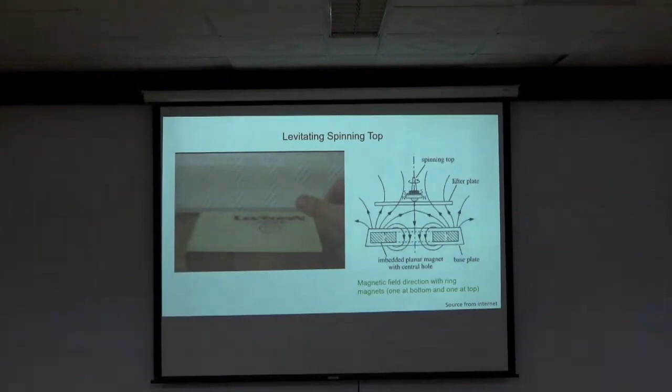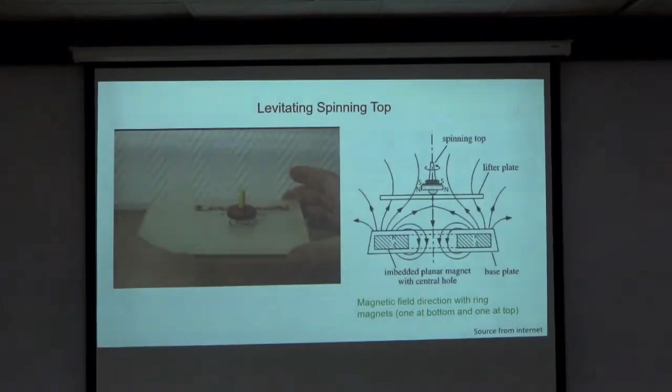I will just show a small video regarding levitation. This is levitation by permanent magnet of a spinning top. Now you can see that this rotating top is levitating in air, and this is due to two magnets, one at the bottom which is ring type, and another on the spinning top, also a ring type magnet, and you can see the magnetic field here.

This top will be in equilibrium where the magnetic field changes direction. So this is one example of how levitation works, but here once the top stops rotating, it will drop. So the condition is that it should keep rotating; only then are we able to levitate it.

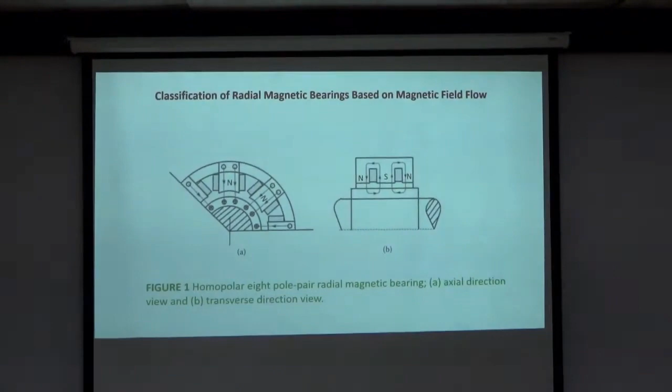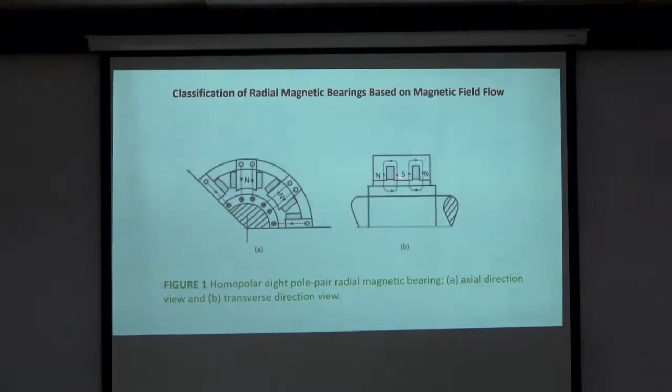Sorry. So coming to the classification of bearings, based on various types they can be classified. One of them is how the magnetic field flows through the shaft. In this particular thing, this is the shaft. In these magnetic bearings, you can see the field is parallel to the shaft's axis.

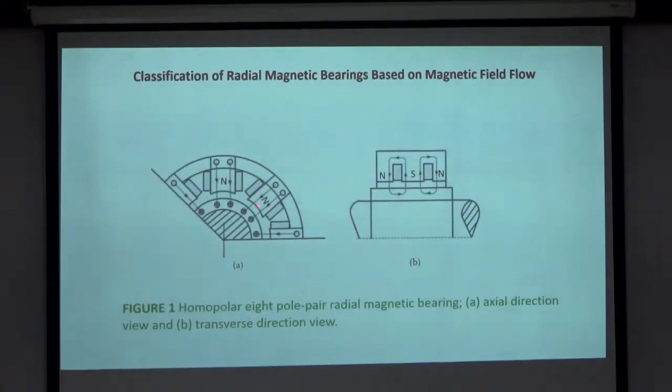And if you see the other view of the same magnetic bearing, in this case you can see the north pole. All are north poles on this side of the magnetic bearing. This side, at the back, is the south pole. Because all poles are the same, that's why it is called homopolar.

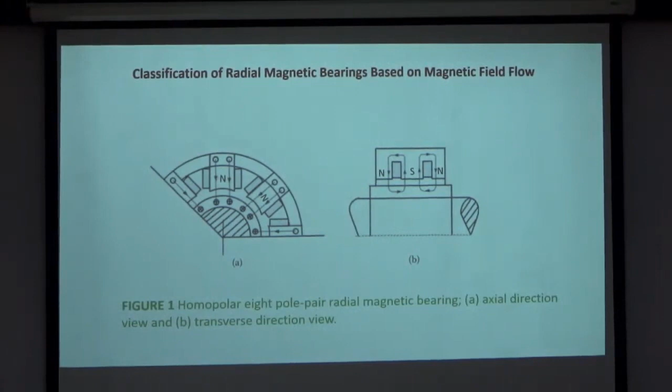And this particular, as I mentioned earlier, to make the flow of the magnetic field closed, we need to have north and south pole. Okay, so here we can count: this is 1, 2, 3. Similarly, if you count like this, there will be 8 such poles which are balancing the rotor. That's why it is called 8 pair pole magnetic bearing. This is one of the classifications, in which the magnetic flow is in the axial direction of the bearing.

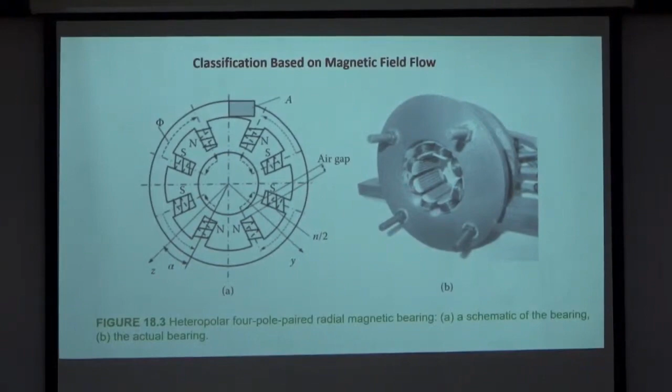So this is one of the actuators which we have in our lab. This is the same 8 pole heteropolar magnetic actuator. You can see there are 8 poles, pair poles in this. So this is a magnetic actuator. The shaft will carry this particular core, so that the magnetic losses are less, because steel losses will be more. So these are silicon steel. In this particular case we need to provide the core onto the shaft on the journal, so that the magnetic field will flow through this and the losses will be less as compared to pure steel.

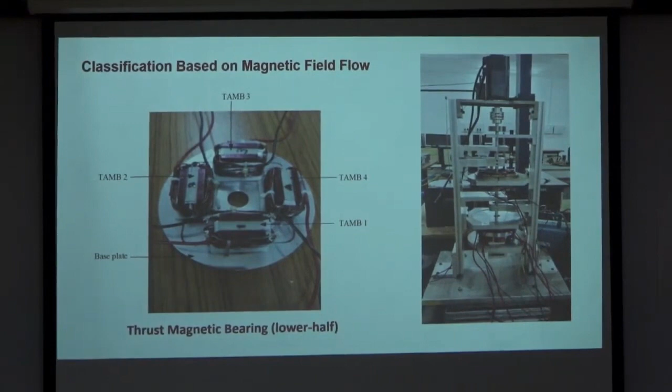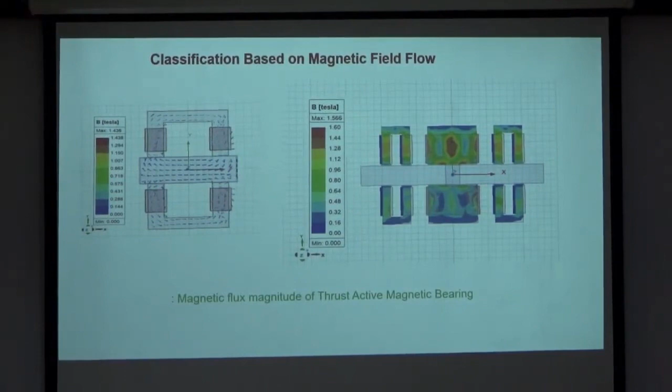Okay, and this is the magnetic field calculation we have done, in which you can see there are 2 poles here and 2 on this side. So there are 4 at the top and 4 at the bottom, and the magnetic pull we can calculate using this kind of software.

Okay, so again classification, I am still continuing with that. We can have either the passive magnetic bearing or the active magnetic bearing. Passive, as we have already seen, is pure levitation. In this we need to have some constraints, only then can we levitate the bearing, otherwise it is unstable. But with an active magnetic bearing we can control things, but we require a controller and an amplifier to do that. So this is another kind of classification we can do for the magnetic bearing.

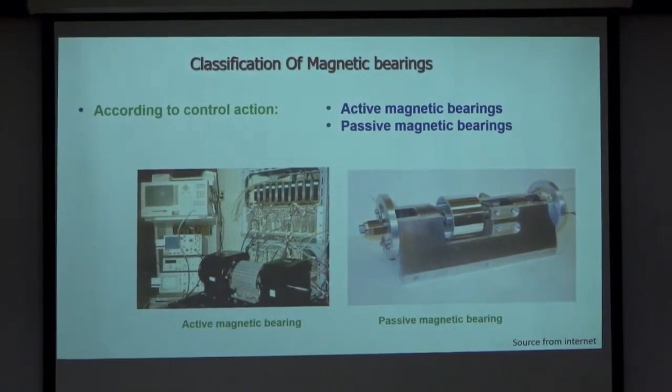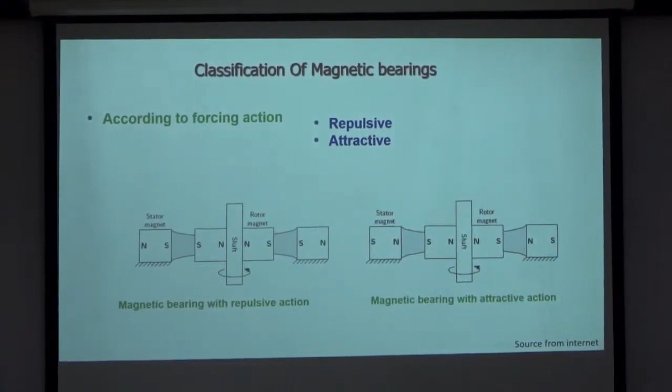Sometimes we use a combination of the electromagnet and permanent magnets. So with that we can have either a repulsive or attractive type of force to the shaft from the bearing. So based on the placement of the north and south pole, we are able to provide either a repulsive force onto the shaft, or an attractive force onto the shaft. So this is another kind of classification.

Sometimes, as I mentioned in the introductory slide, we require a displacement sensor to find out the operating position of the bearing, and that is another kind of classification in which we use sensors, and sometimes we don't use displacement sensors, but Hall sensors based on the magnetic field. We are able to obtain the magnetic field intensity, and we can have the controlling action with that.

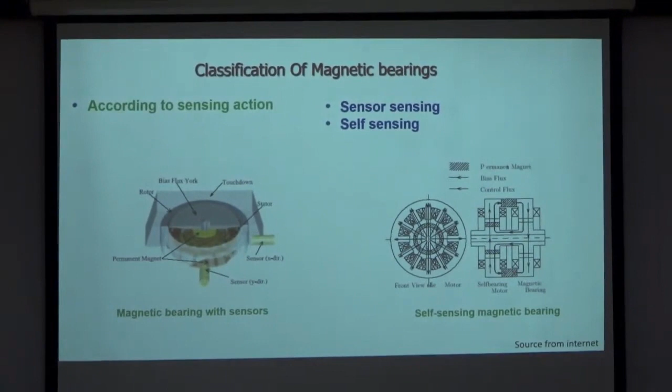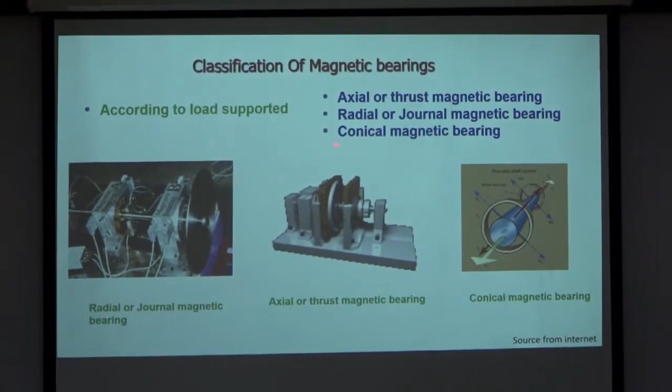So as for the other kinds of bearing, here also we can have axial or thrust magnetic bearing, radial or journal magnetic bearing. People have even tried out the conical magnetic bearing, in which a combination of both the radial and the axial thrust can be given, just like a taper roller bearing. Similarly, here also people have tried conical magnetic bearing.

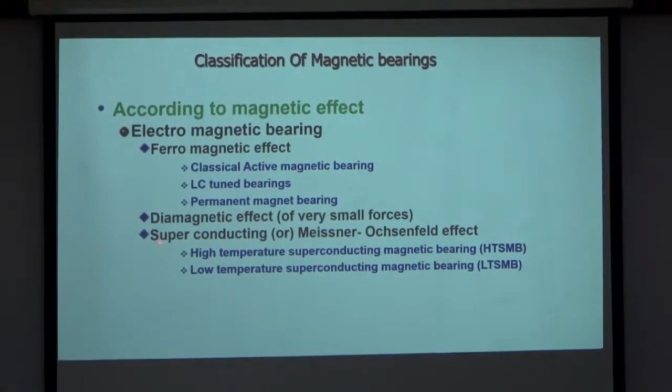There are several types of classification which we are able to do based on various criteria. These are some of the criteria. I will not go into much detail on this. So according to the magnetic effect, electromagnetic bearing, and then so many other classifications are there, like ferromagnetic effect, diamagnetic effect, or superconducting material. So this is one of them.

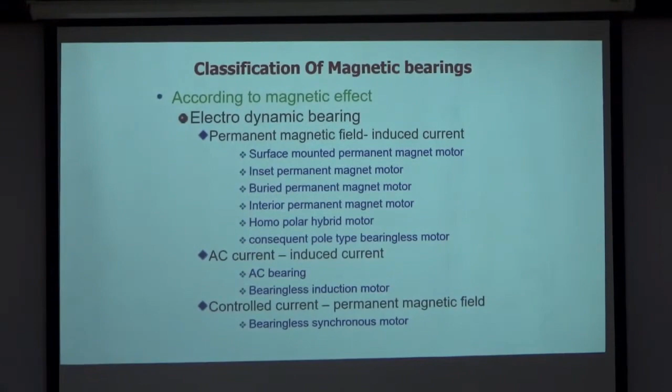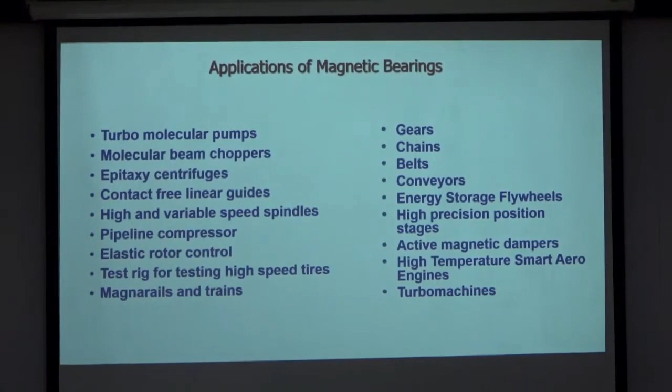Coming to the application, gradually you will find it is used especially where speed is the main criterion. If very high speed is there, when we are talking about 1 lakh RPM or more than that, then this magnetic bearing definitely has an advantage, and some of the applications I'll be describing in the next slide.

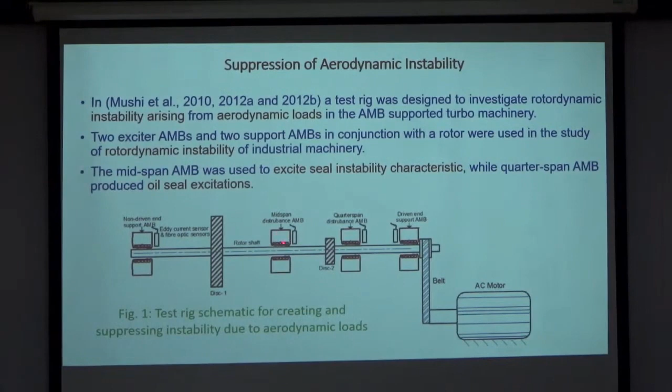So this is one of the applications in which you can see there is a shaft. There are 4 bearings, all are active magnetic bearings. The last ones on this end, the drive end, are the bearings supporting the shaft on air with magnetic actuation. In between there are 2 more magnetic bearings. They are providing some kind of aerodynamic instability or aerodynamic load which is actually there in the turbines. So in this particular case people are simulating the aerodynamic effect through this magnetic bearing.

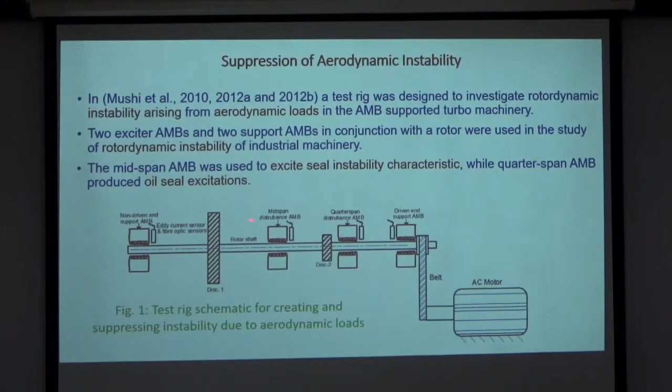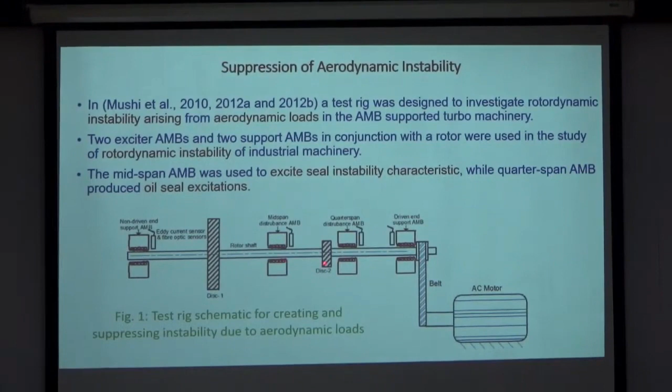So not only are we able to use the magnetic bearing for supporting, but any kind of excitation you want to simulate, that also we can simulate using the intermediate ones, and then we can check whether the supporting bearings are able to suppress that particular instability or not. So this is one of the applications, and this is the test rig for that from some other author. So these 2 are the supporting bearings. These are the disturbance bearings which are simulating aerodynamic instability in the rotor, and they are controlling that particular instability.

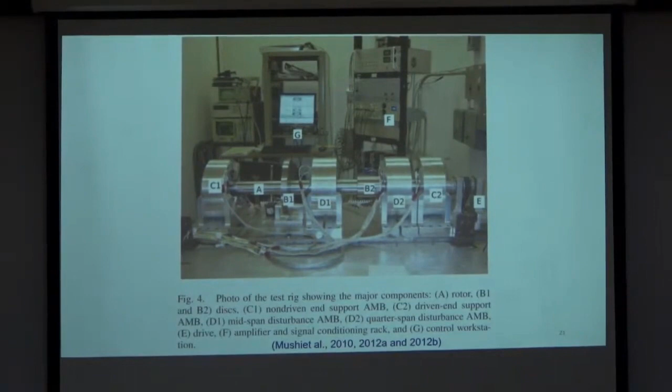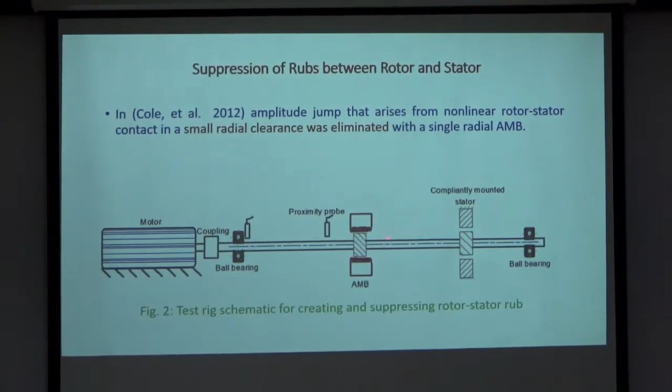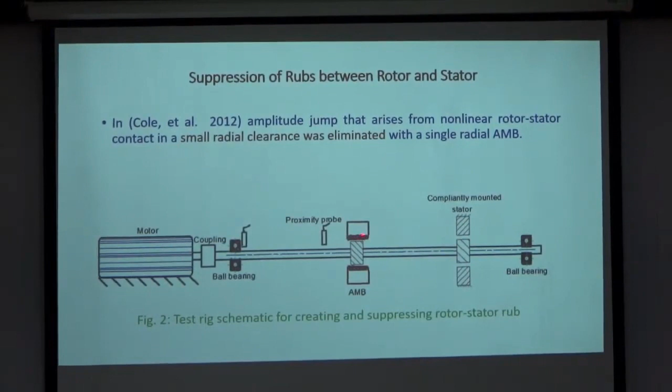Another application: if there is some kind of rub between the rotor and stator, this active magnetic bearing can help with that. We can have some operating position of the shaft, and if it is going beyond that, this particular disc will touch the stator. If this magnetic bearing is not there, this gap will close, and rotor and stator interaction will take place. But if the magnetic bearing is there, we can have its operating position, and as soon as this particular disc is going close to the stator, it will actuate and suppress that particular disturbance. So this is another application of the magnetic bearing.

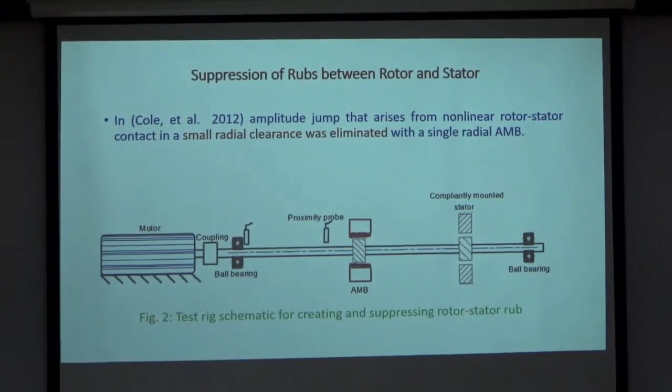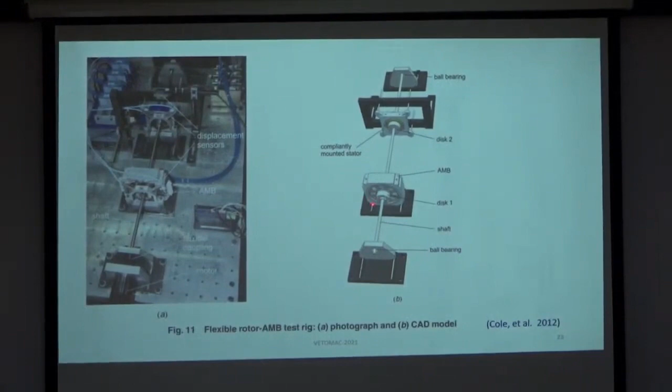So here you can see it is not supporting the shaft, but it is acting as a controller to suppress the vibration. This is the rig, I think the design, in which this is the magnetic bearing. Yeah, this is a magnetic bearing, and here that particular stator rotor interaction was taking place, so they were able to suppress that.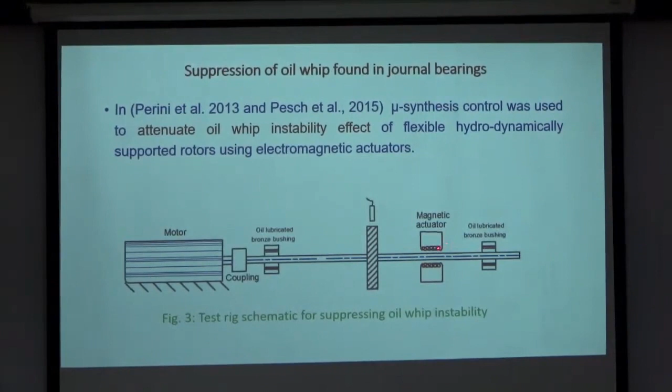Another application is the oil whirl which takes place in hydrodynamic bearings. So these are the hydrodynamic bearings, the shaft is mounted on them, but this magnetic bearing is suppressing that particular phenomenon if it is occurring. If there are large oscillations of the rotor, this magnetic actuator will act and suppress that particular disturbance. So this is another application of the magnetic bearing.

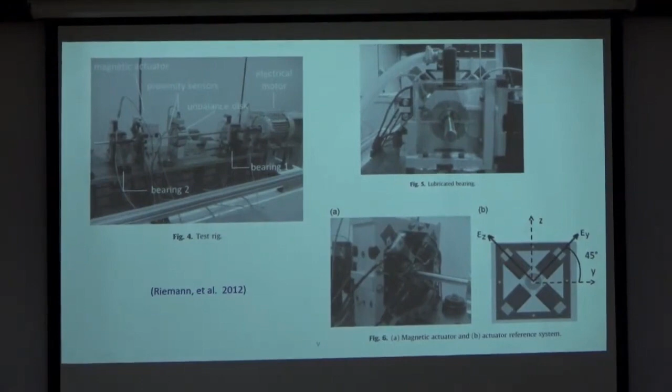This is the test rig the authors have designed. So you can see the rig, and this is the hydrodynamic bearing, and this is the magnetic bearing which is suppressing the oil whirl phenomenon.

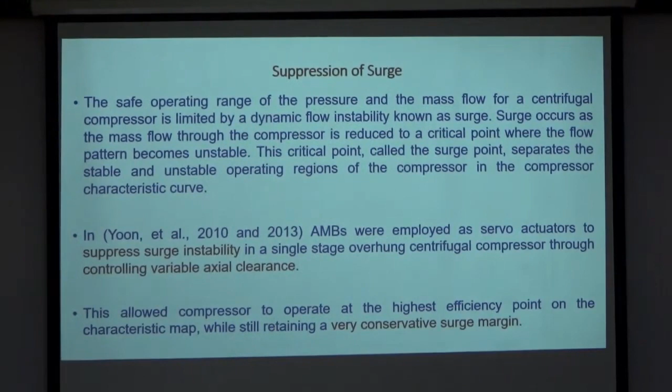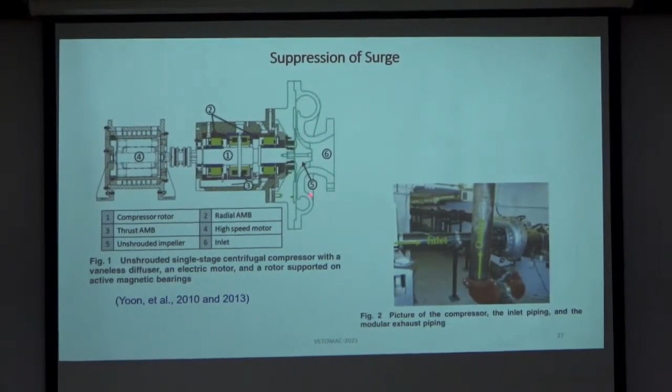Another example is the compressors, the surge phenomenon in which there is an instability condition of the pump. So here, this is a compressor, you can see the blades of this, and these two yellow ones are the radial magnetic bearings. In between there is a thrust bearing.

So here the impeller axial clearance was controlled by the thrust bearing, so that this compressor works in the optimal working condition or optimal efficiency conditions. So the axial thrust was controlled by this particular thrust bearing, to maintain the pump always at the best efficiency point. So not only radial control, but axial control also can help in increasing the performance of the bearing.

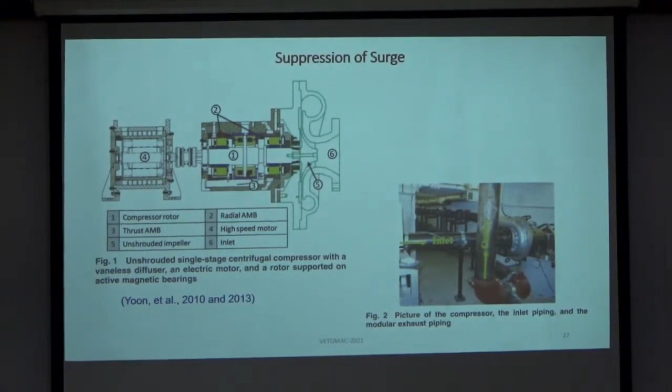So some of the advantages as compared to the conventional bearing I will now highlight. Because there is no lubricant, all the problems of lubrication, wear and tear will be eliminated here. Especially in applications where the lubricant may contaminate the other working fluid, the magnetic bearing has an advantage, like vacuum techniques. At very high speed, the only friction is between the air and the rotating rotor. So if we can provide a vacuum there, that friction can also be eliminated.

So clean and sterile rooms, like medicines and other applications, have a lot of applications. Transport of aggressive or pure media, where we don't want any lubricant to get into the fluid or material we are handling. So this is a typical actuator and the core of the magnetic bearing.

So this is one of the turbomolecular pumps which is used especially in separators. For example with petroleum, if they want to separate its various contents, they use this turbomolecular pump, and that operates on the order of 1 lakh rpm or more. For that, conventional bearings will generate very much heat.

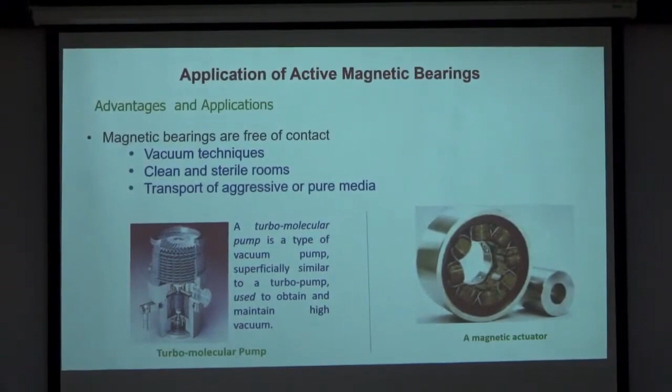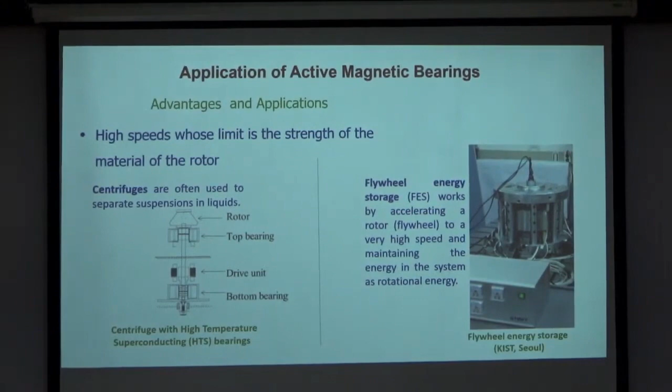Then there is the application in the centrifuge, and now people are using it for flywheel energy storage systems, for instance in the power plant, because a very large flywheel can be made and floated with the magnetic bearing, and energy can be stored. Whenever there is a deficiency of electricity, this energy can be taken out again. Even for e-mobility, they are using energy flywheels in automobiles. So I'll show some slides on that also, like this one. People have already started developing.

Professor Tiwari, yes, we have 5 more minutes.

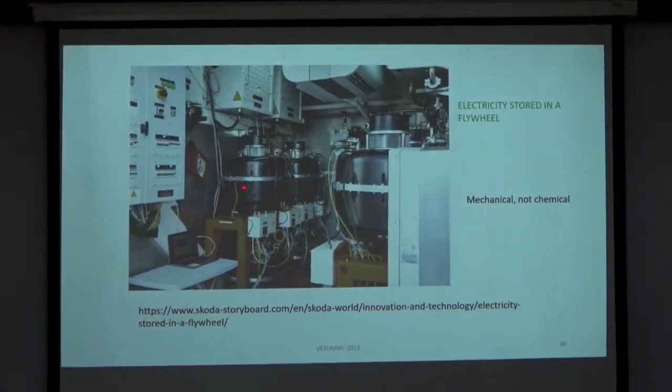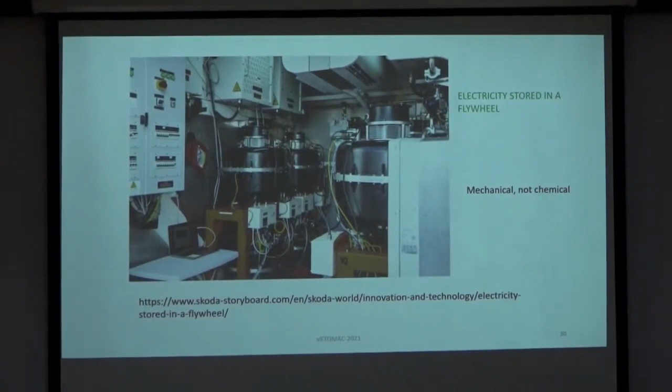Yes, please. So this is some kind of battery you can say, but it is not a chemical battery. A flywheel is rotating inside, levitated by magnetic bearings, and this is mechanical energy storage, not chemical. So environmentally it is very good, and the life is also very high, on the order of 15 to 20 years for this kind of storage system.

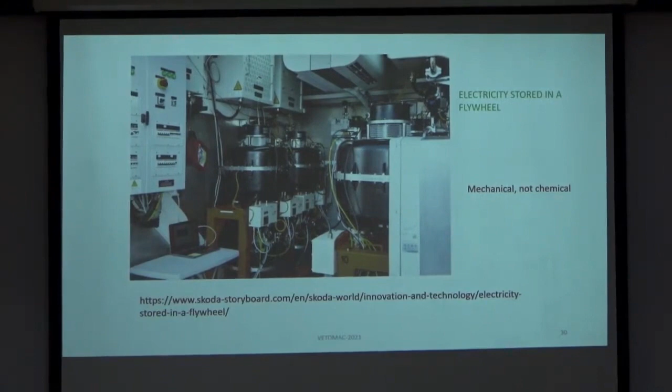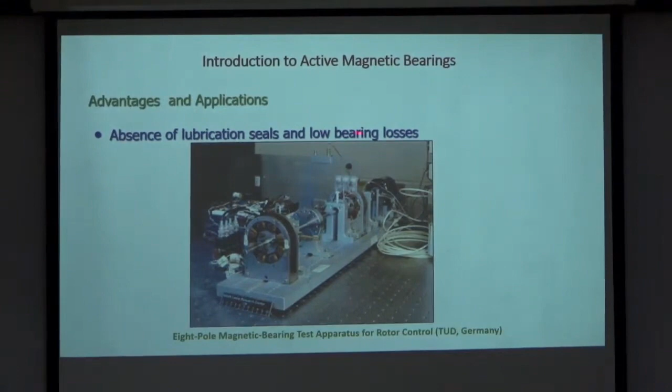So, as I mentioned, sealing and lubrication will not be required if we are using magnetic bearings. And this test rig was used for crack detection in the shaft. This is from our laboratory, and we developed an algorithm based on which we detect if there is a crack in the shaft, based on measurement of the actuation force we are giving to the shaft during the rotation of the cracked shaft.

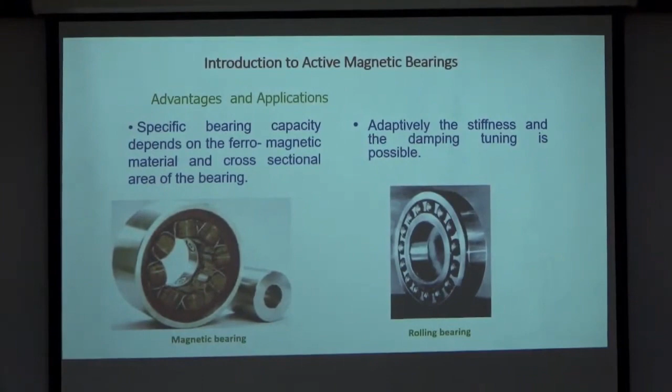So in the conventional bearing, the load carrying capacity is fixed, but here we can change it. Not only that, we can change the stiffness and damping property also, depending upon the requirement, online.

So this I already explained, that the magnetic bearing is not only to support the load, but to control if there is any disturbance of the rotor. Also we can give actuation force, like we simulated the aerodynamic force, so that kind of force also we can simulate. So it acts as a bearing, actuator, and some kind of exciter, we should say.

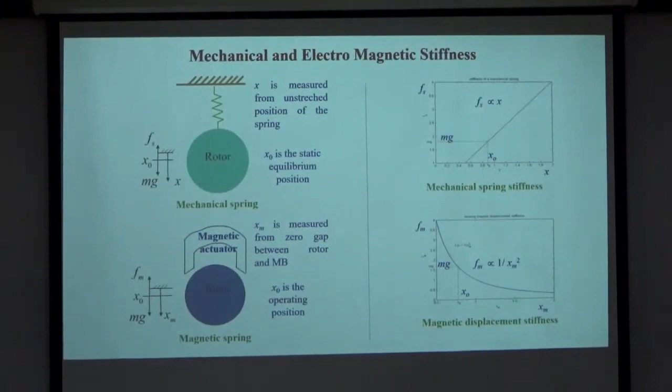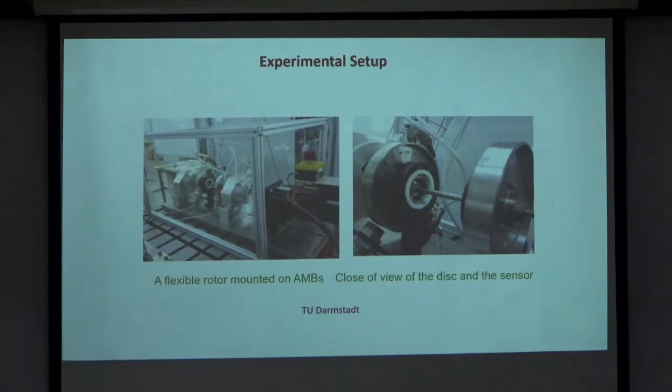Yeah, so I'll skip this part. I'll just go to some case studies which we are doing. So this I did in the Technical University of Darmstadt. One test rig was there with a very flexible shaft. So we did something on the dynamic balancing, flexible balancing of this rotor based on the magnetic bearing. Here you can see these aluminum frames, they are two magnetic bearings, and we conducted some research to do the flexible rotor balancing of this.

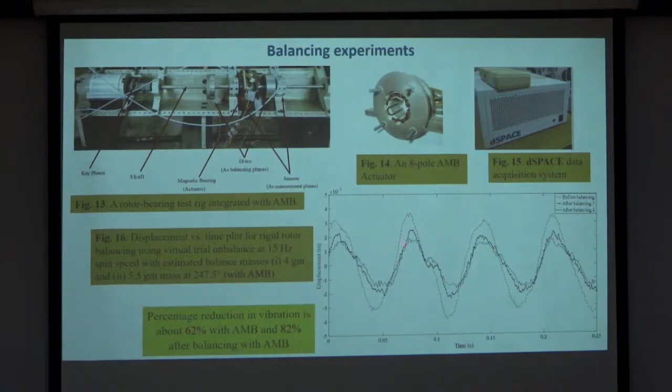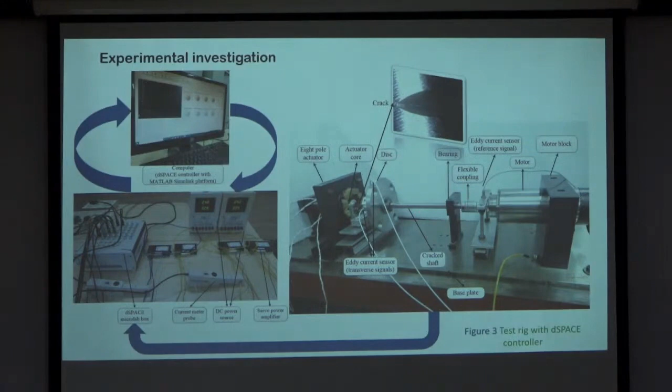Then here also in IIT Guwahati we developed a rig in which we did the flexible rotor balancing. You can see there are two discs and the actuator here. This actuator is mounted there. This is the controller, and you can see how much reduction in the vibration we could achieve after balancing. So this is a plot of that. This I already explained, the crack detection we did with the magnetic bearing. So this is the overall circuit of the rig.

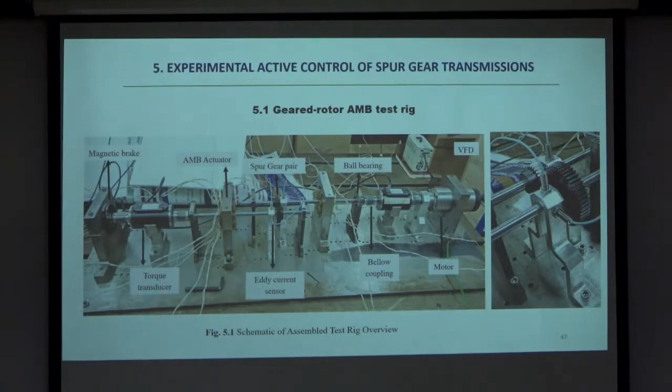This another rig we developed for gear noise reduction and quantifying the transmission error in the gear. In this you can see there are two parallel shafts. This is the drive end and the gear is here, and two magnetic bearings we used to suppress the vibration, and we found that the noise was reduced, and also by the analytical approach we calculated the transmission error in the gears. This is another view of the same setup. Here the power supply, amplifiers, displacement sensors, these are there.